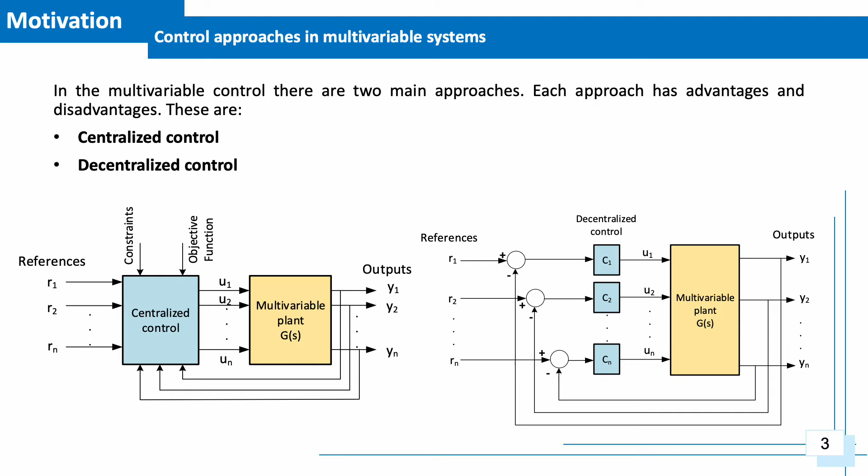In multivariable control, there are two main approaches. Each approach has advantages and disadvantages. These are centralized control and decentralized control. To establish loop pairings in multivariable systems, the interactions that occur between their inputs and outputs are generally measured. A seminal work to measure the interaction of the inputs and outputs of a multivariable system is called the relative gain array, and was proposed by Bristol.

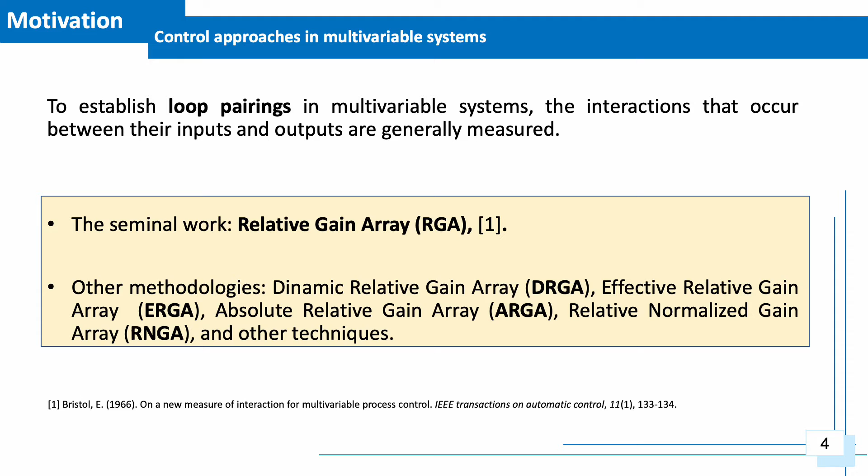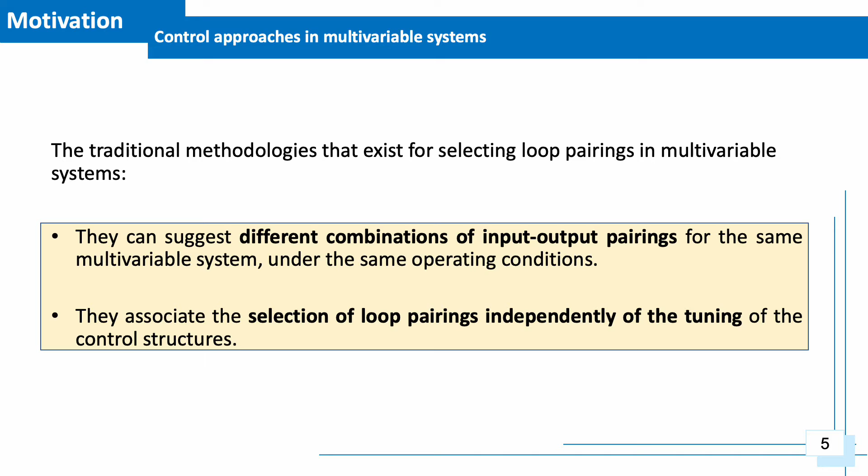After Bristol's work, other methodologies were presented to carry out decentralized control of multivariable systems. The traditional methodologies that exist for selecting loop pairings in multivariable systems can suggest different combinations of input-output pairings for the same multivariable system under the same operating conditions. They treat the selection of loop pairings independently of the tuning of the control structure. To exemplify the above, a preliminary example will be analyzed below.

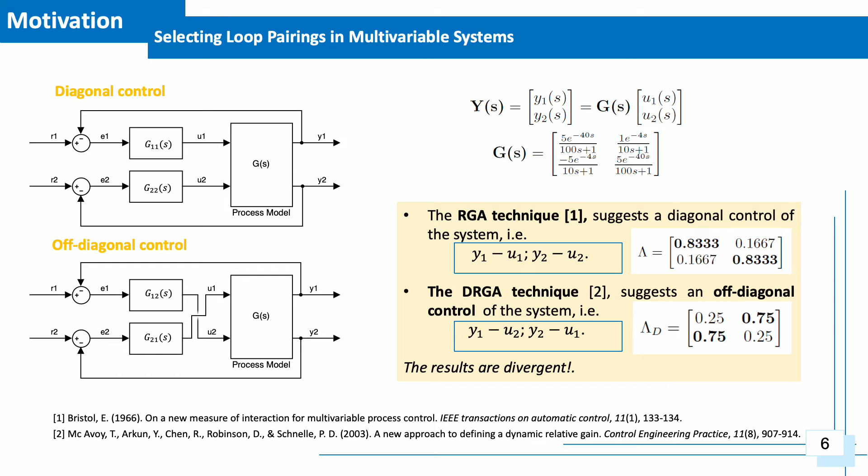A system with two inputs and two outputs is shown, where U1 and U2 represent the inputs and Y1 and Y2 represent the outputs. The process model is represented by G. The time delays are in seconds and the system gains are scalar. The RGA technique suggests a diagonal control of the system. The DRGA technique suggests an off-diagonal control of the system. The divergence of results suggests the idea of analyzing the problem from another approach.

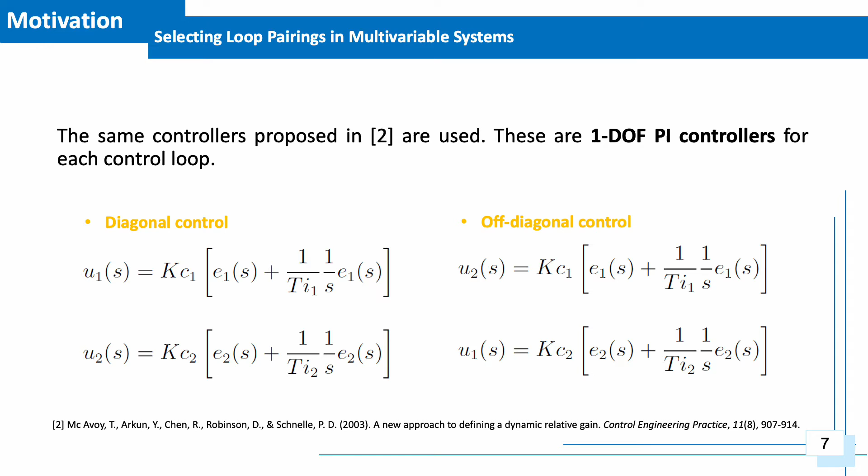The same controllers proposed in the reference are used. These are PI controllers for each control loop. In order to tune the controllers, an optimal tuning approach is proposed, minimizing a single objective. The quality of the control is evaluated using as performance indicators the integral of the square error value and the integral of the control action value. The table shows that the off-diagonal controller is better than the diagonal controller.

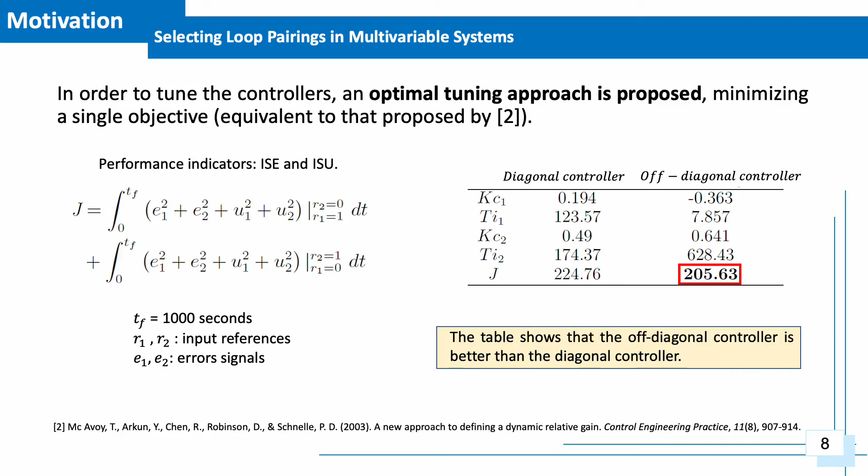Two questions are stated to discuss more details about the selection of control loops. The first question is, what would happen if PID controllers are used instead of PI controllers? The controllers shown are proposed to answer the question. The performance of each controller and the tuning parameters are detailed in the table shown. The table shows that the diagonal controller is now better than the off-diagonal controller.

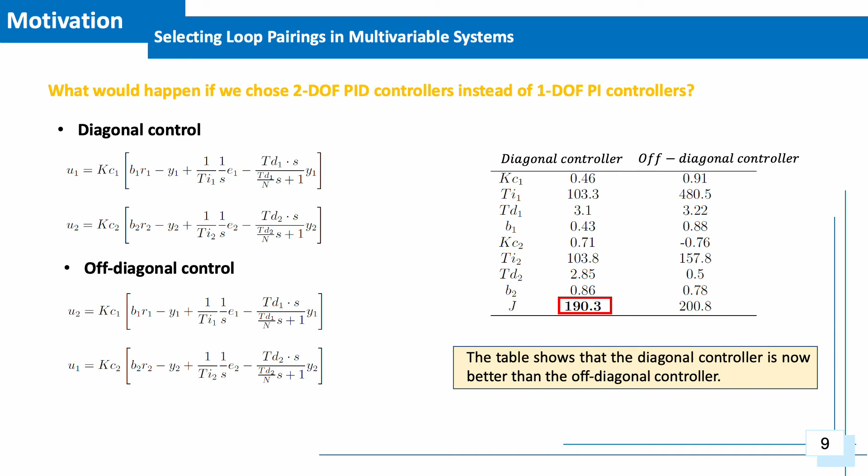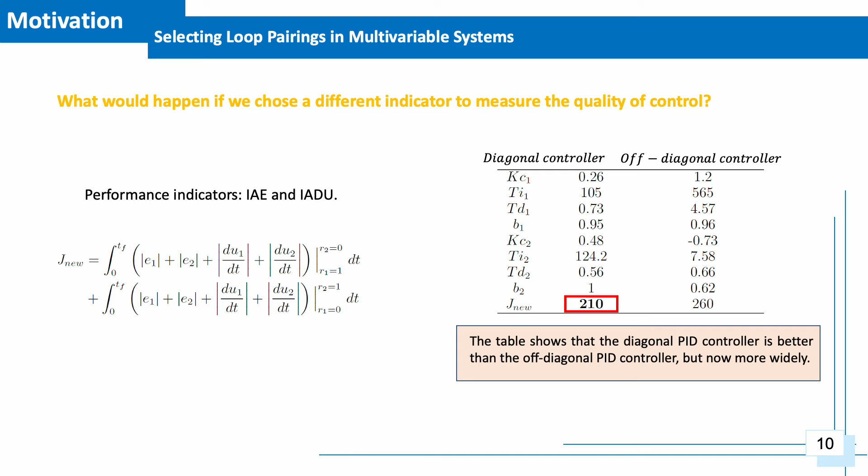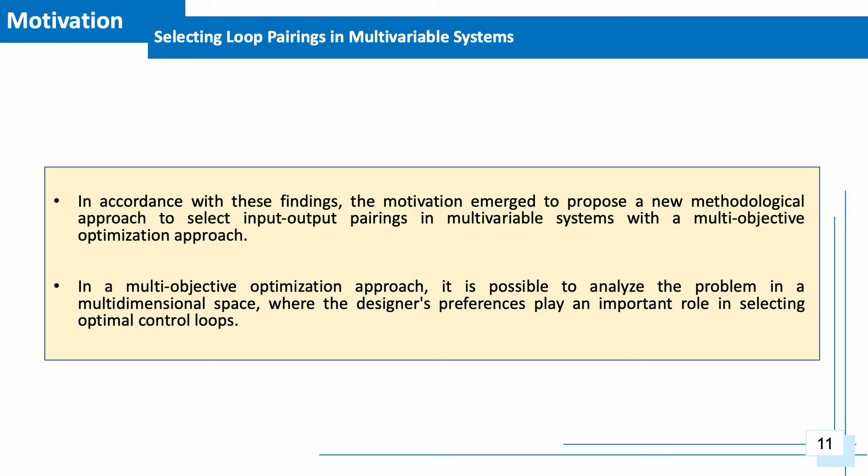In accordance with these findings, the motivation emerged to propose a new methodological approach to select input-output pairings in multivariable systems with a multi-objective optimization approach. In a multi-objective optimization approach, it is possible to analyze the problem in a multidimensional space, where the designer's preference plays an important role in selecting optimal control loops.

Now, I'm going to explain the introduction to multi-objective optimization. A multi-objective optimization design procedure consists of at least three stages. In stage 1, the multi-objective optimization problem is defined. In stage 2, the Pareto front is obtained using a multi-objective optimization algorithm.

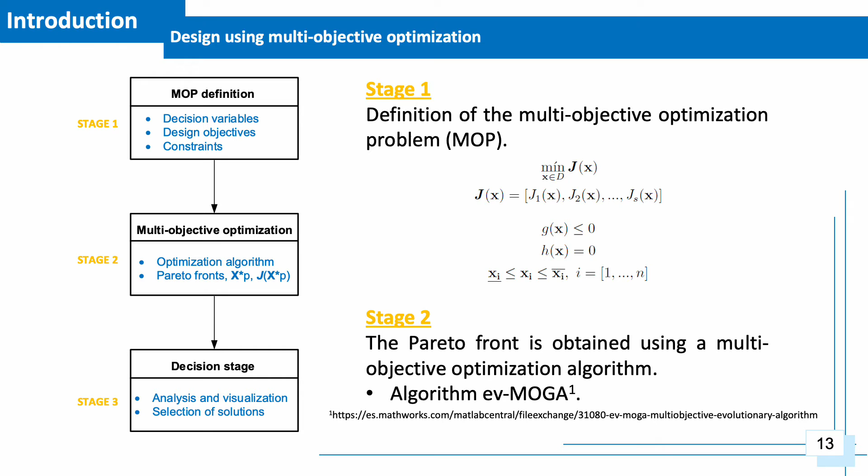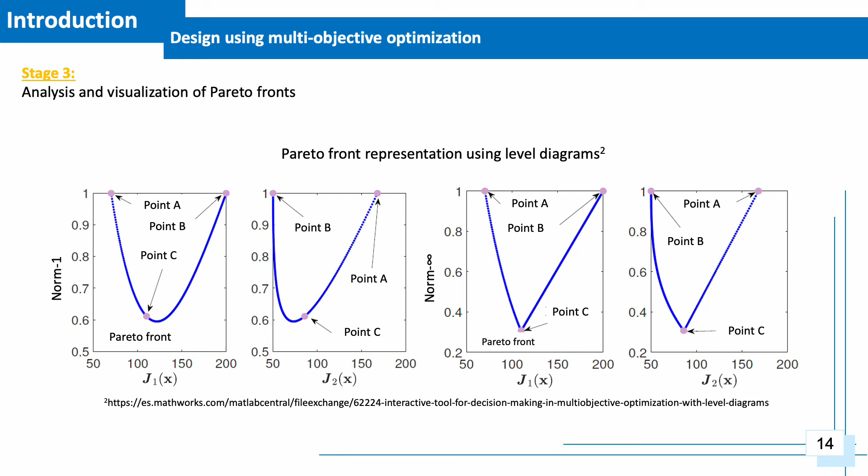It is important to mention that the proposed methodology is independent of the optimization algorithm used. Stage 3 corresponds to decision making to analyze and visualize the solution of the Pareto fronts. The multidimensional fronts visualization tool called level diagram was used. More information about the tool is shown on the website.

Now, I'm going to explain the methodological proposal. Consider a multivariable system with n inputs and n outputs as shown in the figure. A control alternative for the multivariable system is proposed. This control alternative is known as a design concept and is defined by two aspects.

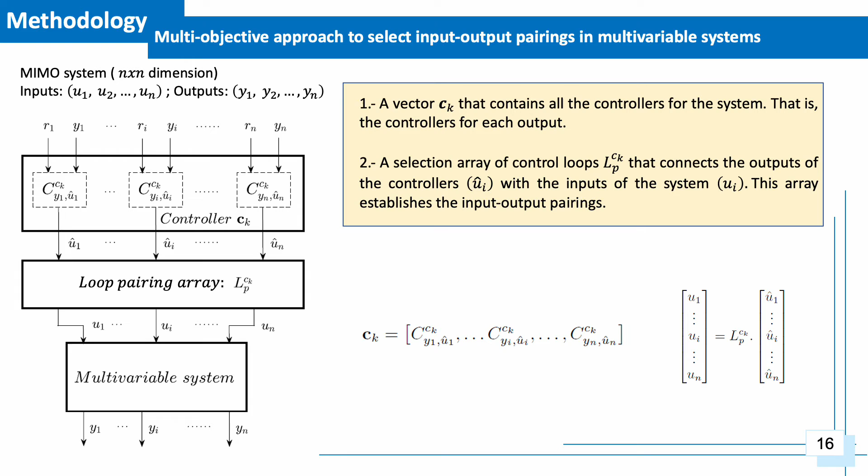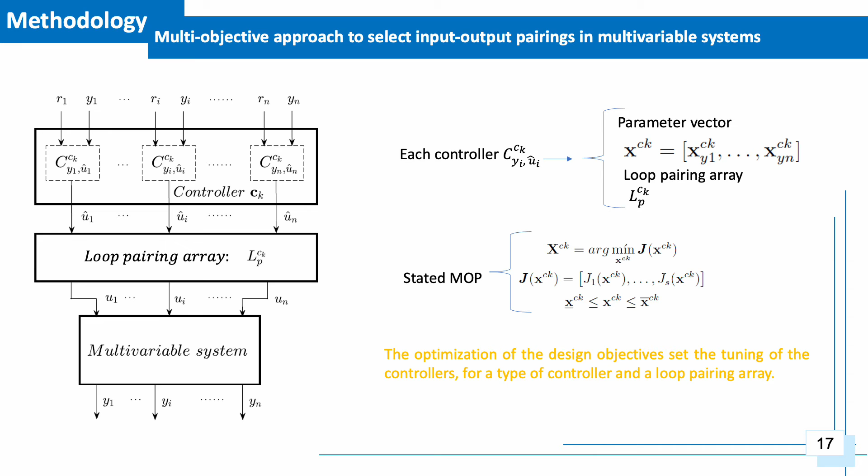First, a vector that contains all the controllers for the system, that is, the controllers for each output. Second, a selection array of control loops that connects the outputs of the controller with the inputs of the system. This array establishes the input-output pairings. Now, each controller is optimally tuned using a parameter vector that contains all the controller parameters and must have an associated loop pairing array. The optimization of the design objective sets the tuning of the controllers for a type of controller and a loop pairing array.

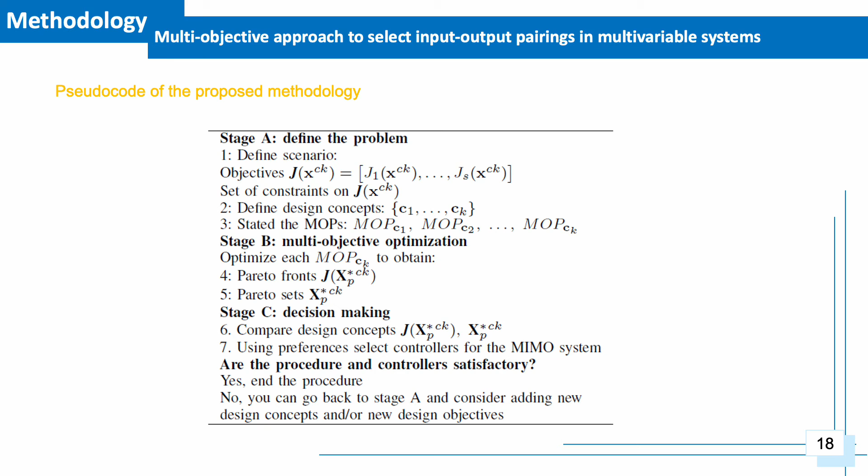The methodological proposal is shown on this slide. In Stage A, the problem is defined. Multi-objective optimization is performed at Stage B. Stage C is the decision-making stage. If the performance of the system does not satisfy the designer, it is possible to return to Stage A and start the process again. Now, I'm going to explain the application.

The methodology is applied to control a nonlinear multivariable system called a boiler turbine unit, where X1, X2, and X3 are the system state variables. X1 is the drum pressure, X2 is the electrical power output, and X3 is the fluid density. The inputs U1, U2, and U3 denote: U1 is the valve position for fuel flow.

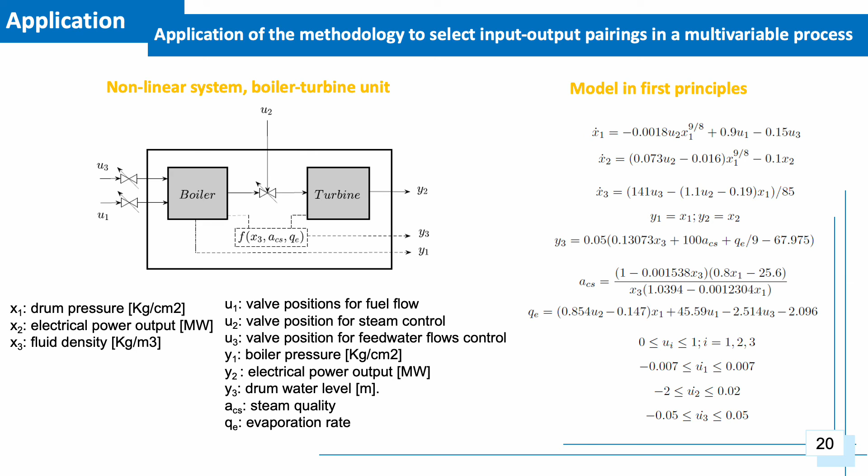U2 is the valve position for steam control, and U3 is the valve position for feedwater flow control. The outputs Y1, Y2, and Y3 denote: Y1 is the boiler pressure, Y2 is the electrical power output. The output Y3 is the drum water level. The output Y3 depends on steam quality and the evaporation rate.

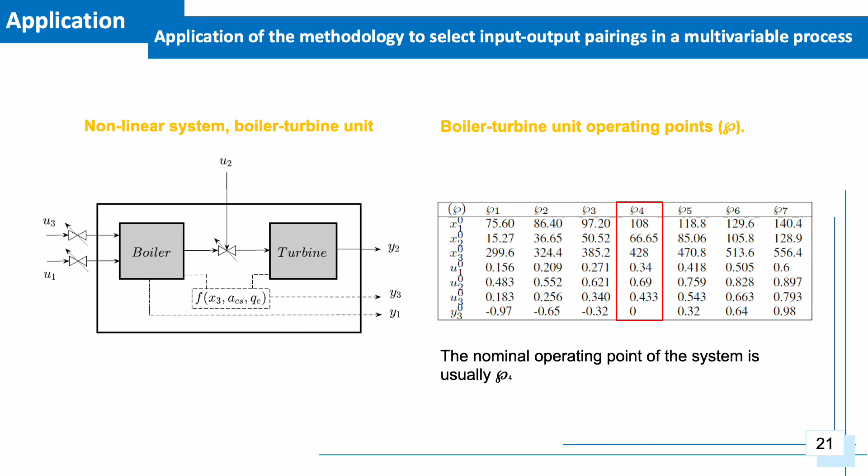This slide shows the main operating points of the system. Point 4 is the nominal operating point of the system. The methodology was applied when the system was at this operating point. Two design concepts are proposed with their controllers. Each controller has an associated parameter vector. In the multi-objective optimization process, 6 design objectives are minimized to evaluate the performance of each controller.

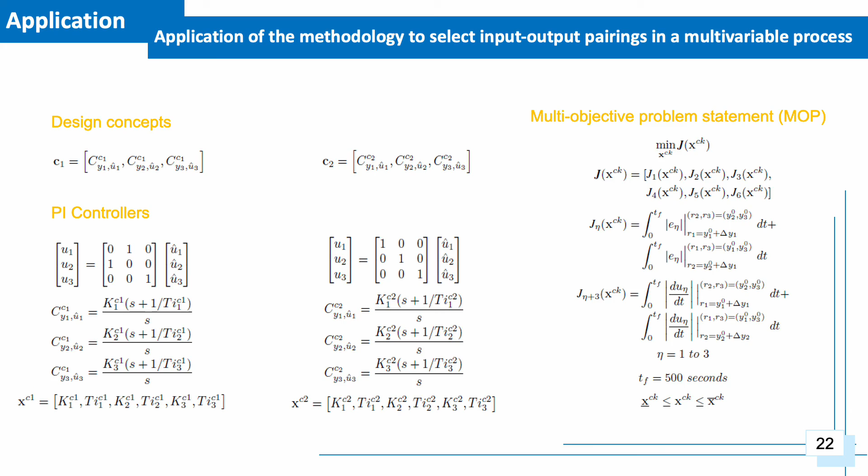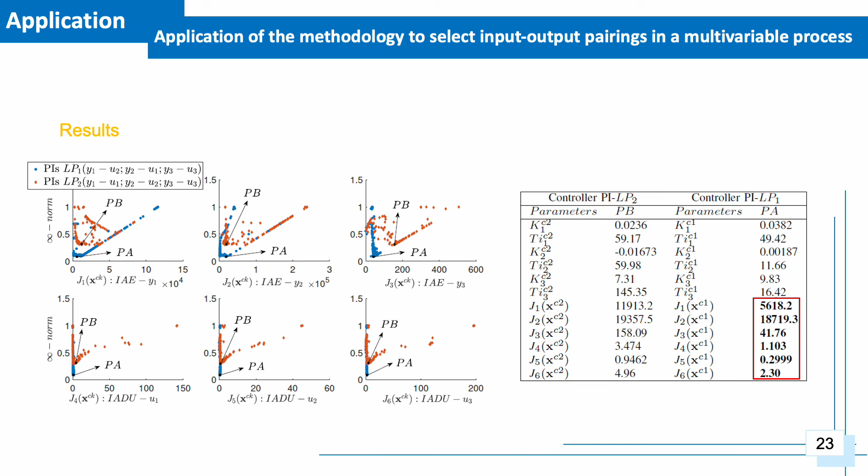After the optimization process, the following results were obtained. The figure shows that one design concept is better than the other. The table shows that the blue design concept is better in all design objectives than the brown concept. This slide shows the system outputs for two selected controllers on the Pareto fronts of each design concept. It is possible to observe that the blue controller is better on all outputs than the brown controller.

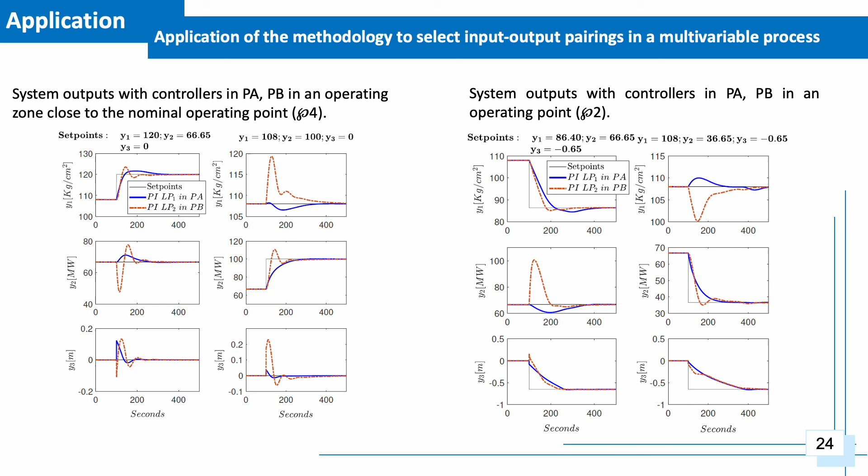Finally, the conclusions. The applied methodology allows both the optimal selection of loop pairings and the optimal tuning of controllers. An interesting aspect is that the methodology was applied directly to the nonlinear system. That is, it is not necessary to linearize the system. The proposed methodology has embedded the selection of input-output pairings and the optimal tuning of the controller in what is known as a design concept.

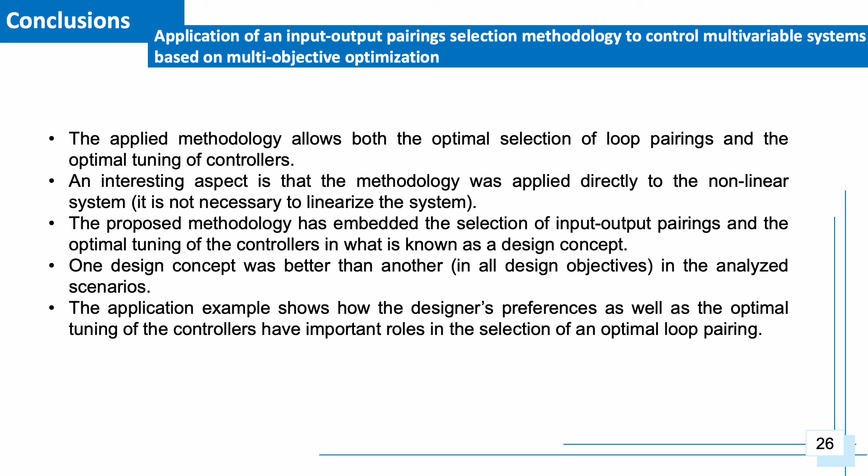One design concept was better than another in all design objectives in the analysis scenarios. The application examples show how the designer's preference as well as the optimal tuning of the controller have important roles in the selection of an optimal loop pairing.